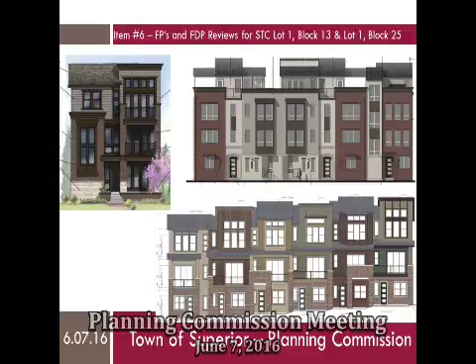The subdivision requests are required to divide each block into developable lots and defined outlots, and the FDP requests are required to develop each of these subdivided areas. On Block 13, the applicant is requesting to create 92 developable lots and 13 outlots. On Block 25, RC Superior is requesting to create 25 developable lots, 7 outlots, and 1 super lot.

As clarified in the project narrative, these final development plan requests to develop these lots include 3 different product types, and examples of each of those product types are illustrated on the slide here.

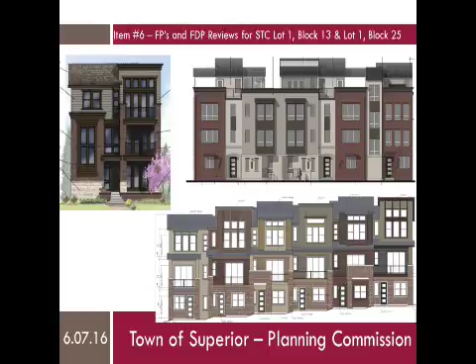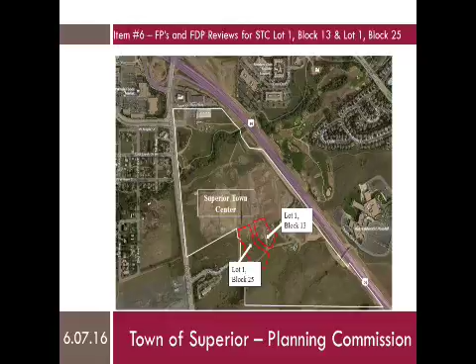Block 13 and Block 25 are located within the Superior Town Center, Planning Area 3, as indicated here. Their location within the overall Town Center is a little bit better illustrated by this land use diagram. Those 2 lots outlined in red fall just south of Old Railway, and they're also flanking Promenade Drive, which is one of the primary arterials that connects Planning Area 2 with Planning Area 3 to the south.

The plan also illustrates that Planning Area 2 is intended to serve as a commercial core of the town center with flex zoning that allows for a dense mix of commercial and residential uses, and Planning Area 3 is primarily intended to develop residentially as indicated by the yellow coloring, with some flex space allowed within Planning Area 3 as well.

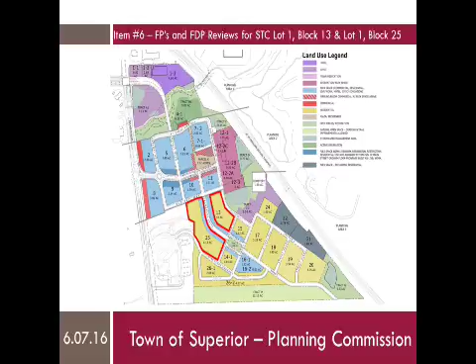A mix of 3 different housing types and builders is proposed for these 2 blocks. The 2 major subdivision plats are generally illustrated here, with Block 25 on the left and Block 13 on the right.

The reason for the individual plat requests stems from the fact that the 2 blocks in question are affiliated with different plats currently. Block 25 was replatted as part of the joint Discovery Office Park Superior Town Center replat. This replat occurred in May of 2015 to allow Discovery Parkway to connect with the town center. Block 13 remains part of the Superior Town Center.

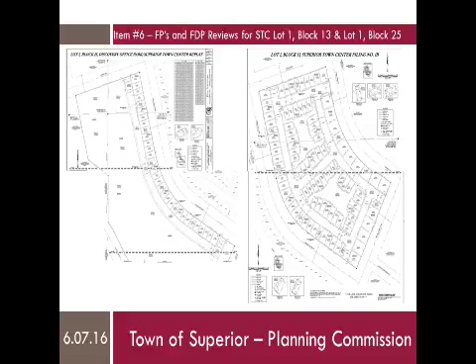Filing 1B replat. As illustrated, the applicant is proposing to plat and develop all of Block 13, shown here, and a portion of Block 25, which is just the western boundary of Promenade. In total, 117 residentially developable lots would be created by this proposal.

The subdivision request for Block 13 is illustrated here. It would divide this 4.1 acre block into 92 developable lots comprising 2.31 acres and 13 outlots comprising 1.79 acres. This request would yield a density of 22 dwelling units per acre. Lot sizes would range from 720 square feet to 1,924 square feet.

As configured, 48 lots shown in gray would be internal to the property, and 44 exterior lots shown in tan would line the surrounding public streets. Old Railway exists to the north, Superior Drive exists to the east, Village Greenway exists to the south, and this is that Promenade Way or Promenade Drive mentioned earlier.

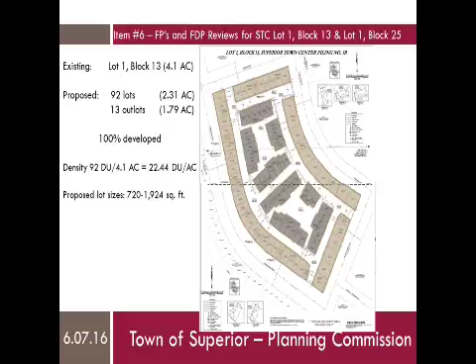The associated FDP sheets clarify that the 44 exterior lots are designed to face the adjacent public streets. So all these parcels shown in tan would face outward and have rear-loaded garages that front the internal drive. This internal drive is defined as Outlot M and is encircled by this blue line.

The internal lots, in contrast, shown in gray, would face inward towards Outlot A and Outlot B. This arrangement would afford direct garage access to all the proposed units and the internal drives contained within Outlot M, which is outlined in blue.

This design also creates an environment in which the internal drives function as alleys where garages face garages. It allows the more visible units along the exterior of Block 13 to face the public streets, creating a consistent streetscape that is not interrupted by private driveways.

The internal units within Block 13 face shared open spaces that are planned for Outlots A and B. Those areas will be landscaped, and we'll get into those details later.

If Planning Commission and the Town Board are supportive of this general concept and want to avoid instances in which residential lots face garage doors, staff recommends that a note be added to the plat sheet for Block 25, which we'll get into here in a second. Those are for these parcels around here, because only the frontage of Promenade Drive is proposed now.

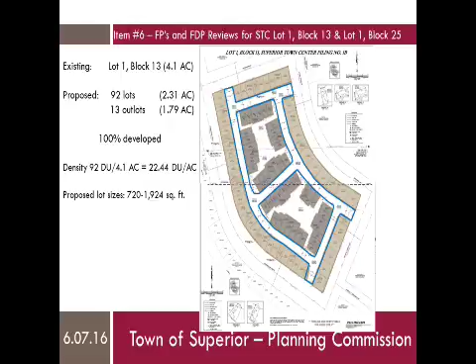As proposed, this design is shy of the town standards for street widths. 26 feet is proposed and 30 are required. For utility easements, it's also shy of the recommended separation for having water and sewer lines within an easement: 32 feet is proposed and 37 is required. Consequently, the town will not accept these as public; they'll remain private.

The applicant has included a separate diagram within the FDP sheets. It's not included in this presentation, but we can go over it if anybody has any questions. It basically clarifies how fire access standards will be met.

The fire district, Rocky Mountain Fire, has reviewed this proposal and raised no concerns through their referral. They did clarify that the streets will need to be paved and hydrants installed before construction-related materials are delivered for development.

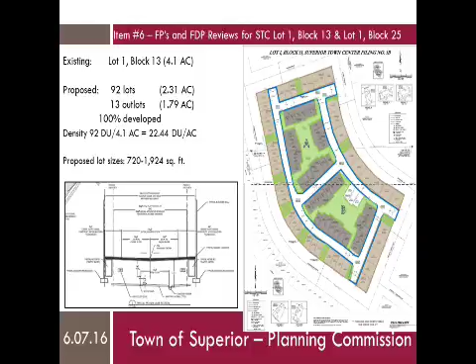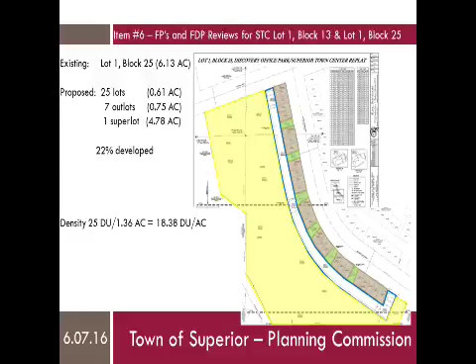Like the east side of Promenade Drive, development within Block 13 would feature clusters of development blocks oriented towards the public streets, separated by landscaped outlots shown in green here, with vehicle access on this private drive lane, which has the same cross-section as seen in the previous slides.

The final development plan sheets clarify the overall development proposal for these two blocks. Many of the FDP sheets have been organized into an overall site plan, separated by match lines showing section 1, section 2, and section 3. Staff worked with the applicant to keep this consistent and easy to follow. This format—the site plan, landscape plans, drainage, and utility plans—all follow the same organization system.

This context map illustrates how these two blocks connect with immediately adjacent parcels within the town center. The purple dashed lines, though faint, show ADA connectivity, and with ADA connectivity comes pedestrian connectivity. This illustrates that there are 3 lots here that are ADA accessible, and 3 parcels here that are also ADA accessible, showing those routes.

Essentially, these folks can head out to the west and connect with Promenade Drive, linking into the system that is proposed, planned, and already approved through separate FDP processes for the streets. FDP 1 Phase 2 in particular approved the streets in this section of town—Promenade Drive, Village Greenway, and Superior Drive connections. Old Railway is part of FDP 1 Phase 1, which was associated with Main Street.

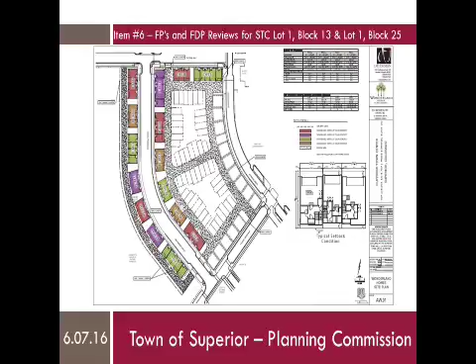The typical setback condition shown here at the bottom right illustrates the setbacks Wonderland is proposing. The lots will be between 20 and 25 feet wide and roughly 38 feet deep. The front setback would range from 2.5 to 4 feet. Shared sides would be 0, sides on corners would be 5 feet, and rear setbacks would be 3 feet as proposed.

Examples of 2 of the clustered townhome buildings are shown here and on the following slide. The proposed design of the building corresponds with the residential townhome designation within the town center guidelines.

These guidelines envision townhomes between 1,200 and 2,500 square feet, and this project falls within that range. The guidelines also clarify that these homes should create a strong building presence along the street and provide a transition from the more urban building products of the town core. As this product is proposed to abut the town core and falls within the size limitations, staff considers it to meet the intent of these standards.

Such other standards as front porches, alley access, and garages are also met. Lining both sides of Promenade Drive with a consistent residential product will also help define this area and signal the transition from the town center to a more residential environment.

Each of these buildings is 4 stories tall, and includes a mix of brick, stone, and lap siding, as well as Hardie panels and asphalt shingle roofs.

The buildings are designed at 49 feet 3 inches at their tallest, but drop down to 3 stories for the majority of the front elevations. As you can see here and here, the rooftop fourth floor component is generally set back from the front.

Accent details include metal handrails, balcony railings, and awnings above select windows. Each unit type has a rooftop deck that's accessed from the 4th floor of the building.

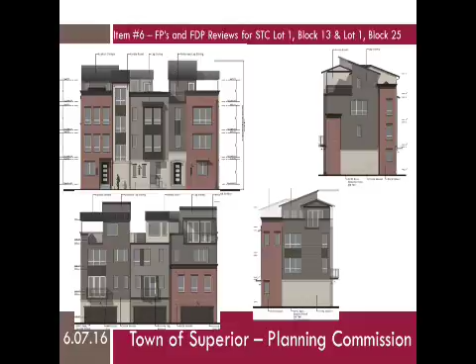The front elevations of each building type are defined by prominent brick end caps. You can see the brick is used from floor to ceiling on the 3rd floors for all of the end caps, and even in some interiors.

This helps create vertical bay spacing and the appearance of individual row houses, thereby complying with the massing and scale called for in the town center design guidelines.

This design also includes a variety of pitched, gabled, and shed roofs, as well as flat roof sections, which help break up the roofline to avoid the appearance of large continuous building forms.

Each townhome unit includes a front main entrance door that is slightly elevated above the street. They all have some step-ups, and some of the doors don't front the street directly - you have to go up the steps and turn left or right to get in. So there's a lot of distinct building variation among each of the units.

There are 4 color schemes proposed, and the materials boards are placed throughout the room. You can look at those in closer detail if you like.

Each color scheme includes shingle and flashing specifications, 4 main colors, a trim color, an accent color, and brick and limestone specifications. Variation between the color schemes occurs in the body of the building as well.

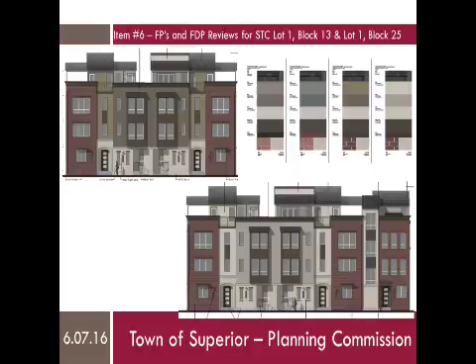This individual site plan clarifies where the Remington homes will be placed within Block 13. These are the residential products sited internal to Block 13. This proposal includes 8 building complexes, each containing between 3 and 8 units, for a total of 48 individual townhomes.

The table and typical setback illustrations on this plan clarify that there are 3 different townhome units proposed, so there are 3 different floor plans within the Remington portion of the site. The variations between 3 and 8 units just have a different variety of those units.

The setback illustrations clarify that these units are 20 feet wide and range in depth between 33 and 45 feet. Each townhome unit is 3 stories with a maximum proposed height of 40 feet 2 inches. As clarified in the project narrative, Remington Townhomes corresponds with the Urban Villa residential typology designation within the town center design guidelines, and this is where I think I had an error in my staff recommendation.

I think I called it a townhome typology, but it is actually the Urban Villa, which envisions residences between 1,200 and 1,900 square feet. They're also defined as compact and can be located on shallow lots. Plan 30, the smallest townhome unit, is 1,276 square feet. Plan 38, the mid-size unit, is 1,634 square feet. And Plan 43, the largest unit, is 1,774 square feet.

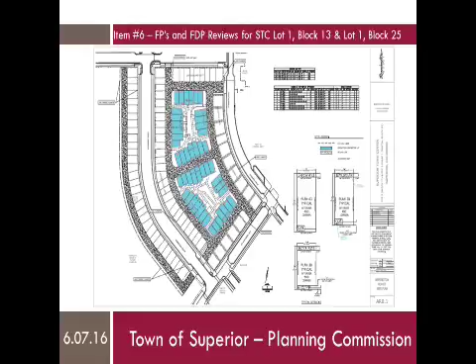Examples of the front and rear elevations for Remington multifamily units are shown here. Although Remington is proposing 3 different floor plans, 5 elevations are also proposed. The front elevation of each townhome includes a mix of stucco, lap siding, brick columns, and asphalt shingle roofs. Stucco is the primary material on the ground level, transitioning to lap siding on the second level, where each unit has a porch with a metal railing.

The primary difference between these elevations is the 3rd-story metal siding, with the window pattern and roof form changing to give different articulation. The color scheme for the proposed buildings includes muted grays, blues, and greens on the upper levels and red brick at the base. The proposed roof forms include gable and shed roofs, coupled with material and color changes in the buildings to help delineate breaks between the individual townhomes, which is something called for in the design guidelines.

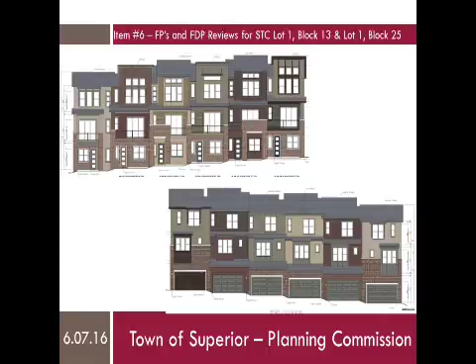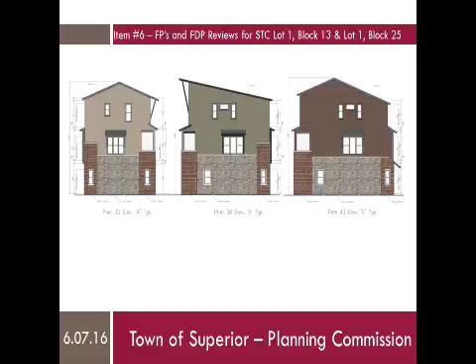The Davidson Communities portion of this site is located within Block 13 on the west side of Superior Drive and on the north side of Village Green Way. It includes 14 single-family detached homes that will front the park across the street on Tract D and Village Green Drive, which also has a park to the southwest.

The development table clarifies that the tallest building height proposed for this product is 46 feet 2 inches. The typical plotting exhibit illustrates that the lots are shown at 1,800 square feet and roughly 45 feet by 40 feet in dimension. The planned setbacks are 5 feet for the front, 3 feet for side, and 3 feet for rear.

These plans range from 2,227 square feet for the smallest three-story option to 3,265 square feet for the largest four-story option. The proposed homes most closely match the villa residential type, defined in the design guidelines as compact residential buildings that can be located on shallow lots with parking provided at the alley in the form of private garages. The PD and design guideline standards, however, stipulate that unit sizes for villas range between 1,500 and 2,400 square feet.

These units exceed the upper end of this range by 865 square feet. Staff understands that the unit size ranges within the established residential typologies were intended to ensure a mix of housing types and sizes. The largest unit within these defined typologies is 3,000 square feet, dedicated to the cottage definition. As the proposed structure falls within the height requirements that govern this block, staff does not believe the plan development or the town board ever intended to limit residential sizes to less than 3,000 square feet.

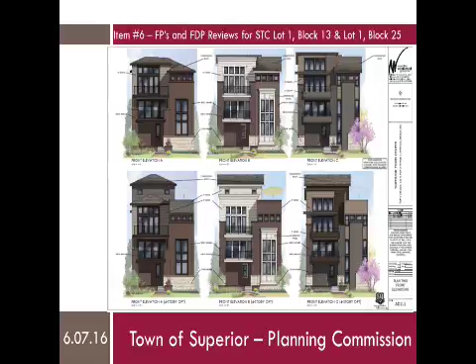4-story plans range in height between 44 feet 11 inches and 46 feet 2 inches. As noted earlier, missing from this plan set but included with Exhibit B are the rear and side elevations illustrated here. The FDP needs to incorporate 4-sided building architecture for each residential product, which is a requirement staff is recommending.

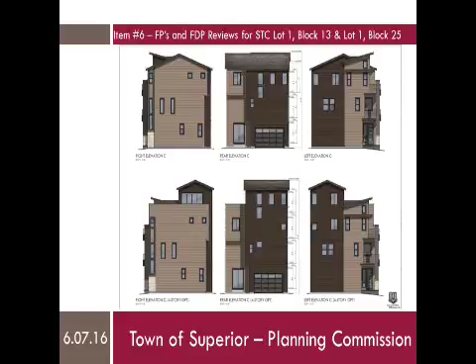The elevations within this exhibit show that the stone and brick wrap around the building fronts and are visible on the side elevations but not prominent. Rear elevations are generally limited to a mix of 2 lap siding types and 1 or 2 building colors. Staff recommends more variety in both colors and materials for the sides and rear elevations. At minimum, we're suggesting that 2 colors should be employed for each elevation, as well as a base wall of stone or brick building material.

So that gets us through the typologies and the products proposed. We'll get through lighting and landscaping, and then we'll turn it over. But if anyone has any questions on anything so far, I'm happy to answer them.

Keep going. Anybody have any questions? Not tired of my voice yet?

Okay, the landscaping sheets collectively illustrate the types, sizes, locations, and care of the species proposed. The overall landscape plan is intended to provide a broad overview. In addition to serving utilities and providing pedestrian paths, the designated outlots within Block 13 and Block 25 will also function as landscaped open spaces for public use. Outlots A and B are in the center of Block 13 and will feature additional seating areas, shown here and here. These are the largest of the proposed landscaped outlots.

This plan sheet also illustrates different paving finishes, so paving patterns and colors are proposed within the lanes in these locations. These distinct paving treatments, which are colored and pattern finish, as well as some precast pavers proposed along certain porches here and here, are the two different concrete finishes. Otherwise, the interior lanes are also proposed to be finished in concrete.

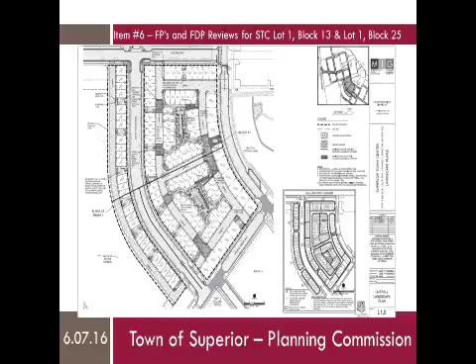The mail delivery program has also been included with this sheet. In general, these bubbles clarify which mailboxes will be associated with which units.

These partial plan sheets more clearly illustrate the landscaping and streetscaping proposed. The overarching goals of the design guidelines clarify that plant choices shall be attractive and sustainable, that material choices shall support a vibrant and public environment, and that plans establish clear circulation patterns for both pedestrians and vehicles. In these respects, staff finds the proposed plans to be in general conformance.

Staff also finds the plans provide an appropriate mix of both species and uses, with some outlots featuring dense plantings and others featuring more usable open spaces. Both parks staff and the town landscaping consultant have reviewed these plans, as well as the applicant's request for using additional species within this development, and they find the proposal meets the intent of the adopted regulations.

The proposed plant list clarifies the quantity and size at installation of each proposed species. This list, in conjunction with the two tables included within the FDP landscape sheets, clarifies that 3 exceptions to typical density standards are being requested. Two of these concern the number of shrubs relative to acreage of block 13 and 25, and the third relates to the percentage of evergreen shrubs proposed.

They're proposing 25%; the requirement is 33%. On block 13, 320 shrubs are required and 240 are proposed. On block 25, 72 shrubs are required and 53 are proposed.

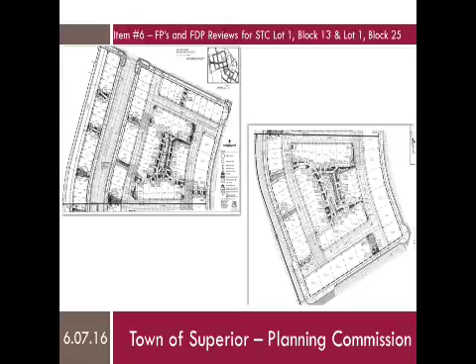As stated earlier, staff is supportive of the overall planting densities and the choices and mix of spaces they're creating out here. The overall site lighting plan on the left provides a comprehensive overview of the proposed lighting locations within Block 13 and 25.

It clarifies various types and fixtures proposed, as well as the illuminance calculations associated with the luminaire schedule and the illuminance calculation summary tables.

The partial lighting plans on the right illustrate more clearly what fixtures are proposed in which locations and clarify the foot candle readings that would result for the lots associated with Wonderland and Remington homes. Wall-mounted lights are shown on both the front and backs of homes.

For the Davidson lots, only wall-mounted fixtures are shown on the backs of homes abutting the internal drives. These plan sheets clarify that 6 streetlights are proposed internal to Block 13 to help illuminate drive aisles, that 41 bollard lights are proposed to help illuminate pedestrian pathways, and that 10 additional landscape lights are proposed within outlots A and B for accent lighting.

The narrative also clarifies that pedestrian scale light poles have been included, so the ones placed within Block 13 are included to ensure pedestrian-vehicle conflict doesn't occur and that there's adequate lighting for safety.

Towards this end, staff is recommending that 2 additional lights be proposed in areas where there are fairly low readings. Out here for lighting, it's a difficult balance because you're trying to balance safety with the fact that this is an entirely residential area, so we're shooting for even distribution of light at a low level so that it's not impacting residences.

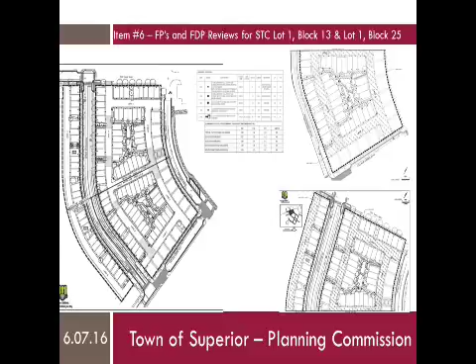In conclusion, staff has reviewed this submittal. These are the spec sheets, you can kind of see the lights. Sorry, I didn't mean to skip over this. One of the other staff recommendations was that these color fixtures match. But overall, they need to clarify which structures are going to use which fixtures. So this is the wall pack for the garages.

That part's clear. They show 2 different porch lights, and they don't clarify which unit is going to incorporate which light, so we need some clarification here. These are the landscape details.

This shows the type of cobble mulch that is proposed, rock cobble mulch, and this is the drainage swales, and then these are the two patterned concrete areas that we discussed earlier. One of the other conditions is just to confirm what type of material these movable seats will be made out of, so that we can confirm they comply with design guideline standards for being relatively easily maintained.

So this is where I was getting to a second ago. In conclusion, staff has reviewed the submittal for compliance with both major subdivision requirements and FDP requirements, and finds the proposal to be in compliance with the applicable criteria. Staff has highlighted a number of exceptions that the applicant was requesting throughout the course of this presentation, and noted a number of technical corrections to the application materials that need to be made through our staff memo. As conditions, staff recommends that PC find this proposal to be in compliance with the PD and recommend to the town board their approval. I'm happy to answer any questions you guys may have.

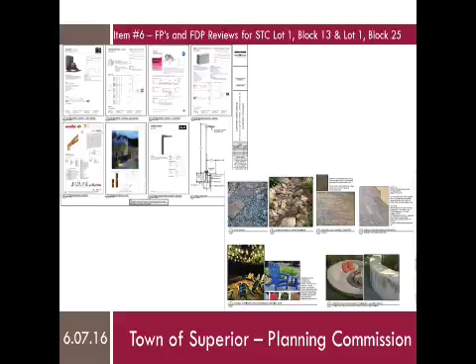Anybody have any questions? So I have, and this may be more for the developer, but on the square footage for the Davidson structures, the overage - that doesn't even include the potential for basements, right? I read in there that there's potential for basements in those units. That's correct, and that's a good catch, but the residential typologies say that those ranges don't account for basement floor area, so it's really just intended to be an above ground floor area analysis.

The other thing is in relation to the fire access standards - they have a separate illustration, and I think I might have it further down, if you want to get into it - but they've basically shown that a 6 by 4 wheel and axle fire truck can get into all of these lanes and have the adequate turning radius. So that's one of our major concerns. But the other thing is just maintenance - at that width, it's more difficult to maintain.

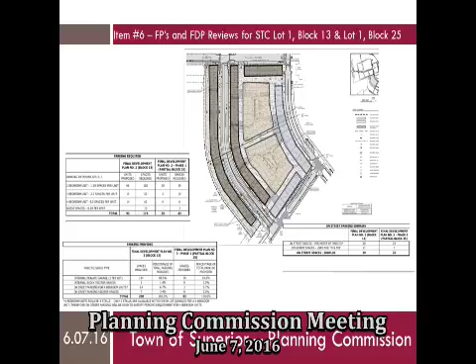Anyone else? I had a question about visitor parking, particularly on the Remington, which is all internal - what do the numbers show on that? There's 3 parking spaces shown within this northern block or configuration of townhomes. The other ones would rely on off-street parking on the public streets.

Can you tell me how many units there are and how many street parking slots would be available in theory? There are 48 units. I would have to go into detail and go back to the page that shows how many bedrooms are proposed within each unit. But the guest parking ratio was done in aggregate, so extracting that out I may not be able to accomplish quickly. I don't know if the applicant can clarify.

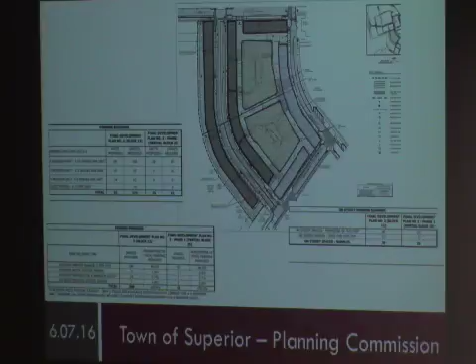Good evening, Bill Jenks, RC Superior. I wanted to say thank you for taking the time to consider this, and thank you to Stephen for the excellent report. We're going to rely on Stephen's graphics. We've also got people here from Remington Homes, Wonderland Homes, and their architect and our landscape architect, in case you have questions we can try to field those.

Same thing for the bedroom count, I wouldn't be able to tell you, but in general there's 48 units there. How many public parking spaces are there on the street? 82, I think. How many for this block? Altogether there's 89. And they're only using 24 of them. I couldn't tell you which ones, but I think they need more than that. So in general, the intent is for guests to park on Promenade or Old Rail or the surrounding public streets, which have 89 spaces available for roughly 48 units in the Remington lot, or 92 units overall in the entire block.

Okay, thank you. You can kind of get a feel of the breakdown here. The majority of units within Block 13, 68 shown, are 2-bedroom units. There are 10 3-bedroom units and 14 4-bedroom units. So most of the units only require a space and a half. If anyone had half a car they could park within the garage, but that's just not how it works out. They are overparked technically, and that's the complicated thing about these ratios. They're providing more parking for private use than required, and providing less guest parking.

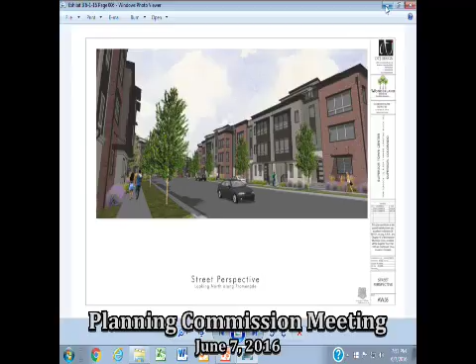And then if you go to the next one, this is a rendering of the Davidson homes. So you see the Central Park on the left. We'd basically be standing on the southwest corner of the sports stable, looking down Superior Drive, with the northwest or northeast corner of Block 13 in the foreground there.

It shows you the massing, similar massing to the Wonderland product, a little bit more variation in building types. Again, these are actually separated homes with a 6-foot setback between homes, so there's a little bit more variation in architecture, all looking over the park. I think it provides a nice transition from the downtown commercial core into the lower density stuff that'll be further south. Aside from that, we have our consultants here ready to answer any questions.

Personally, I've been working on this since January when I got involved with Ranch Capital and came onto the project in the first place. I know Heidi and Guillaume have been working with Ranch and RC Superior well before that, so it's been a long time in process, and we're excited to get started.

Hopefully, if everything goes well with this and the town board approval later this month, we'd hope to be under construction on the horizontal improvements by probably middle of July or beginning of August. Hoping to start homes by September, and then we'd hope to have our first models open by the end of first quarter of 2017. So that's just a little timeline.

Before Bill sits down, the only thing that he, or Dave, or somebody from Wonderland Homes may want to comment on is that we did spend a lot of time on this. The first conversation we had with Wonderland Homes was in September, but there's been a lot of work going into the residential products here, and one of the unique aspects of both the Davidson Homes and the Wonderland Homes are the fourth floor patios and the residential space on the top level. As I understood it, this is maybe the only product type of this kind in the state, or the first in the state, so if you want to speak to that or clarify it.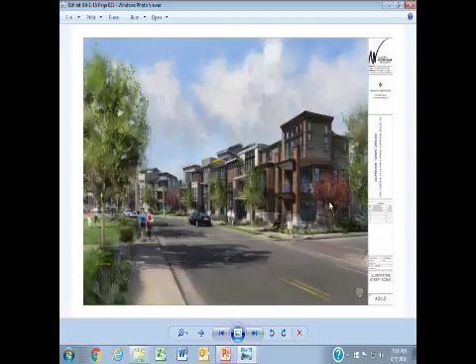The materials, the textures, the colors, everything has really come together, but I think staff is right on—I think it was the Davidson product where the back side and each of the sides definitely need to have an additional color. If I'm correct, that was the Davidson, that was just, looked like just the brown and one stone, but to have multicolor and an additional stone would help add to how fabulous something like that looks, and to wrap it all the way around.

I'd add, on the sides that were shown with the one color that are the pretty simple sides, keep in mind that there's only 6 feet between that and the building next to it. So you might see the first 4 or 5 feet back of that, but you're really not going to see behind that much. When it comes down to the cost for the builders and deciding whether to put more brick on the front or less brick on the front and more on the side where you're not going to see it, it makes sense to pull as much as you can off the side where it's not going to be seen anyway and put it on the important front side. Or at least just wrap that corner to get it around the side. Totally agree with that, and maybe going a couple more feet back so it provides a little bit more interest on the corner, absolutely.

Before you sit down, Bill, why don't we see if anybody else has any questions for our applicant? Okay, guess you answered all our questions. Wonderful, thank you. Thank you.

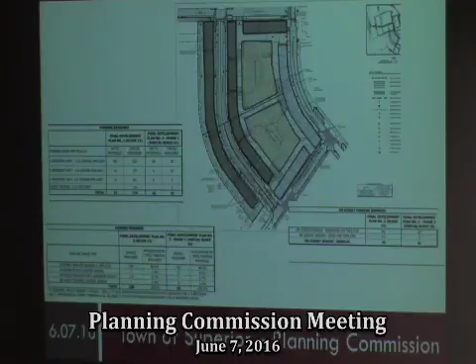But it's also market-driven, and we defer to the developer to create a product that is going to be viable and sellable. I'm pretty confident that what we see here today will achieve that. So I hope that helps, but I'm no expert on all of that—I'm just an opinion.

Thank you. And then just one more thing before we move on—I keep coming back to parking. I wonder what would be the benefit of having permit parking there, or reserved spaces for those homes along the street or portions of the street. It's something we can look into. I'd probably want to consult with the Public Works Director, Alex Ariniello, and I don't see him in attendance today, but it's something I could look into and get more feedback from him, and be prepared to discuss with the town board if that's your recommendation.

In general, from a planning perspective, we often find that places are overparked. Having 89 on-street residential spaces seems pretty sufficient for 117 units when you look at that ratio. The only concern, if we were to go to designated private parking spaces that would serve the needs of the Davidson homes along Superior Drive, is that some of those spaces would also probably be used for park access by the larger community. So maybe we don't designate any along Superior Drive, and instead designate more of the spaces along Village Greenway to the south, just to allow that public parking to remain free for the park amenity. But overall, with a ratio of 24 requested and 89 provided, I don't know that a designation is merited—but Alex may have a stronger opinion. If not, we can look into it. Good point, thank you.